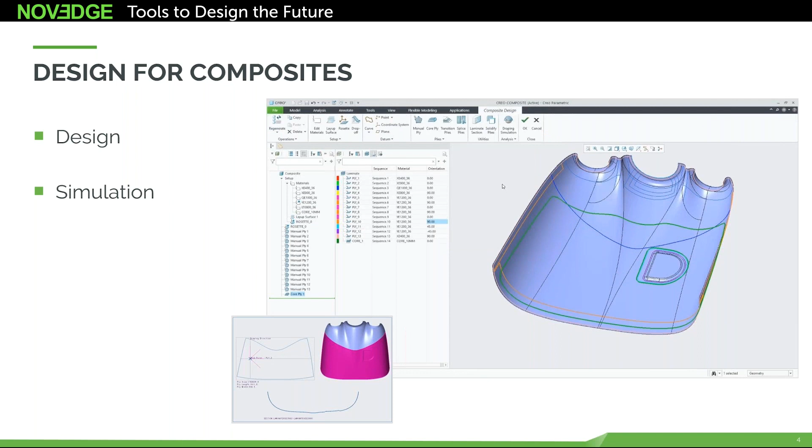Outside of the standard types of analysis, you can also simulate the draping of these different composite designs. Essentially draping, say, a cloth over a given shape is what it would look like, and it's going to drape in a certain manner, helping us understand the stresses, the strain in that action, and really analyze whether or not it can be flattened. If it needs to be split up, you get to see a little bit more into that as well.

To document all of this, we have plybook creation to create the 2D drawings. A lot of that's going to be working from templates, where we'll set up templates that lay out each layer into an individual sheet, really automating the process of getting each of those defined. And finally, from the manufacturing side of things, we have the ability to splice up your plies, split them, and do darting if you need to. One thing I will mention with composites is that this is actually going to be included in the first maintenance release of Creo.

This won't be in the very initial release of Creo, it's going to be in Creo 10.0.1. So by the time you're watching this, it may already be within the tool, but if you're closer to the release of Creo 10, it's going to be out in that first maintenance release, coming up in the near future. Some very strong capabilities there, especially if you're working in the area of composites - definitely something you'll want to look at.

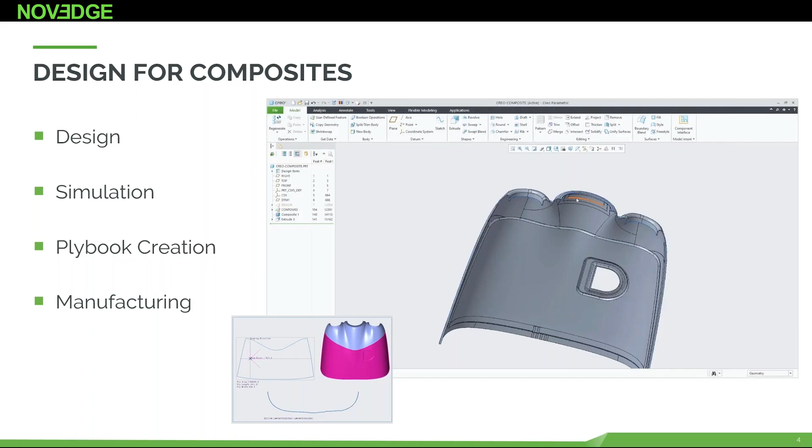Now moving on, we're going to talk a bit more about design for electrification. We've seen a recent resurgence in the need for electrical design, especially as it integrates into what we're doing on the mechanical side of things. So it's an area that we at PTC and Creo continue to invest in, and it starts first and foremost with some usability items.

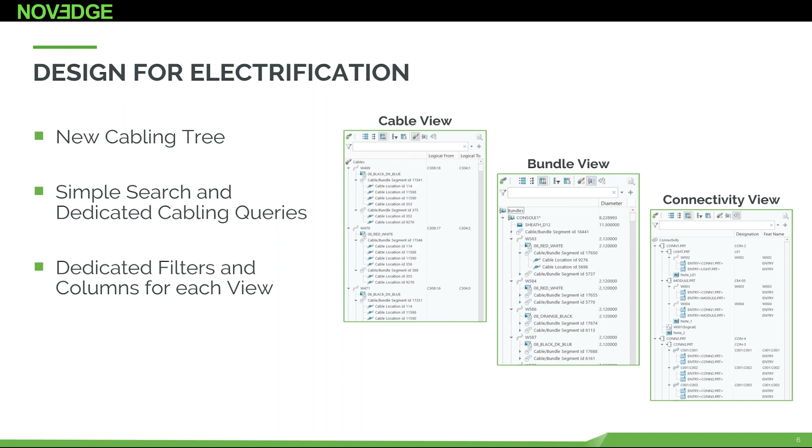A huge part of this year is our new cabling tree. In past versions of Creo, your cables, bundles, and connections were mostly mixed in with the rest of the model tree you're working with. But now you have a dedicated tree that organizes the information much better, giving you the ability to narrow down and search between each functional area quickly. You can work with dedicated filters and columns for each view, giving better visibility into the structure of your harnesses, making it easier to find elements, easier to investigate and validate the harnesses, and keeping your functional design as organized as possible.

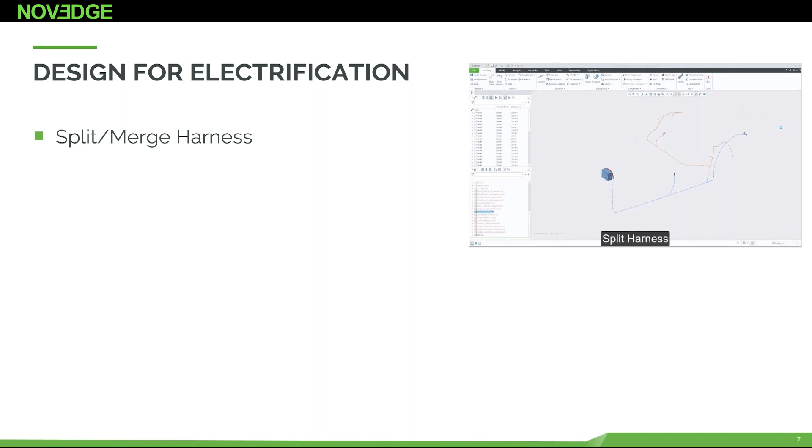The next, and probably the largest area of enhancement in the electrical world, is the added ability to split and merge harnesses. One of the big areas this helps with is collaboration. Say you're working with a large harness and want to split it up - we can split it and work with multiple designers on that, helping you be more efficient and do more work at once. Then once you've completed the work in each area, you have the ability to merge the harnesses back together into a single harness to take forward from that point.

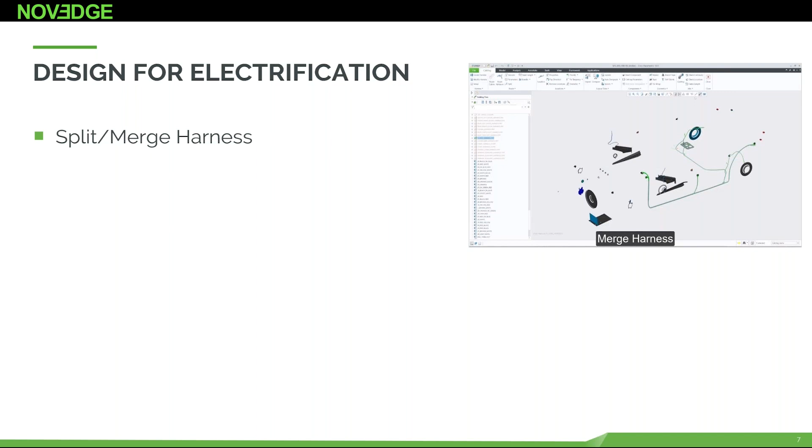Very useful there, with multiple use cases it can help with. For example, say you have one section of a harness that could be useful in a separate design - you could split that area off and use it elsewhere, or even from a manufacturing perspective, if your harness is getting large or complex, you can split it up to ensure your manufacturing documentation doesn't become overly complex or crowded. A very useful tool that we can use at any point in the process.

From an ECAD perspective, we've been expanding our ECAD integration over the past couple of releases of Creo. Now with Creo 10, we've expanded this to include the ability to import paste mask into our design. And whenever it comes to ECAD holes, we now have the ability to define ECAD parameters to those holes - this can be added in, or customized using an ECAD.hole file. So a few different areas we've worked on in electrification, helping us build that into what we're doing on the mechanical side as well.

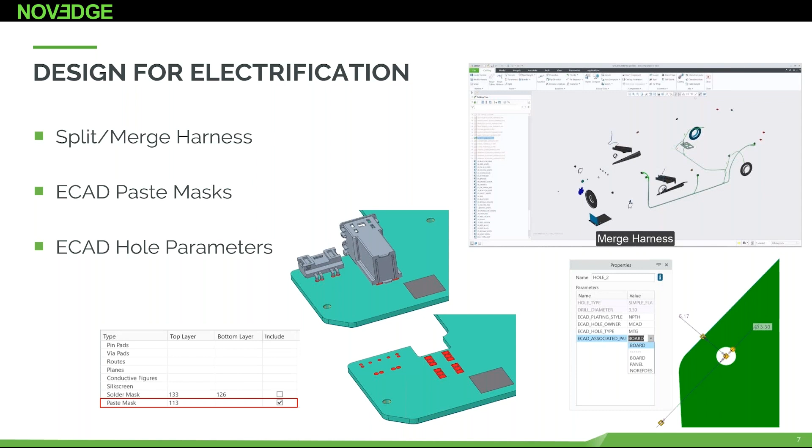Moving on, we're going to talk a bit more about design for ergonomics. We've had a renewed investment into ergonomics starting back in Creo 9, and we've continued and expanded that here within Creo 10 as well. First, similar to other areas, is general usability - giving you the ability to not only use the dragger on certain areas of your mannequins or models to move them around, but also now the ability to define certain distances as well in that environment.

One of the other things that got added in was the ability to measure angles between different joints in the mannequins. Say, for example, you select one of the arms and one of the lower legs. It understands each of those components and gives you angle measurements between each of those.

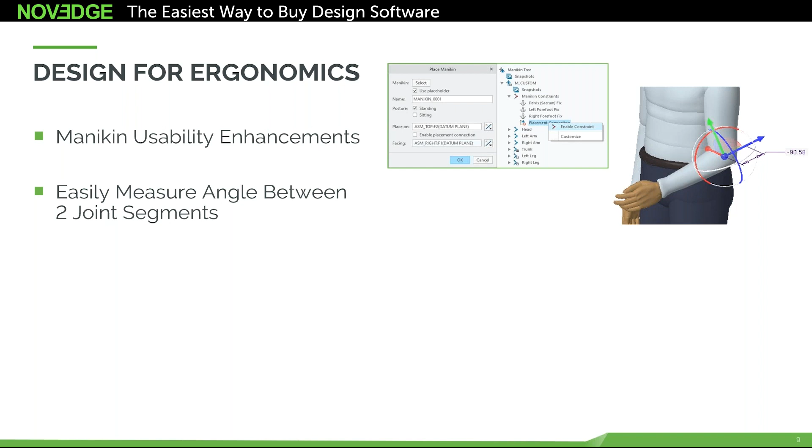We've also expanded the reach envelope. In the past, it was really just looking at the pointer finger, but now you can look at different areas of the hand, like the palm, the thumb, the middle finger, and it could even be combinations of those as well. So a little bit more granularity that you can get in that reach functionality.

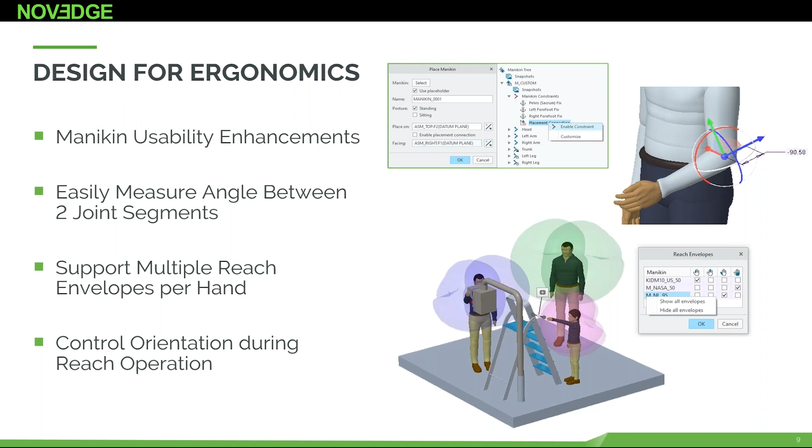A little bit more into the reach - say, for example, you want to place the foot up on a step. You can now say exactly what part of the foot's going to contact that. So just more control overall on how that's being oriented.

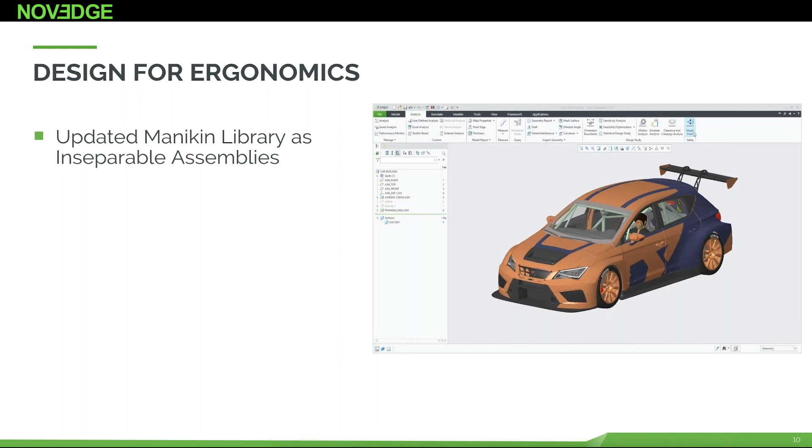Another thing that we worked on here is the Manikin library itself. We are able now to rebuild them as inseparable assemblies, which helps us from a management perspective and makes it easier, since it's just going to be stored as one object that we're working with.

From that point as well, we have the visual field, which had some enhancements too. We have the ability to perform reflection analysis by looking at what we define as a reflective object. For example, like a mirror, you can see that we can get the resulting surface cone that represents the visual field reflecting from that surface.

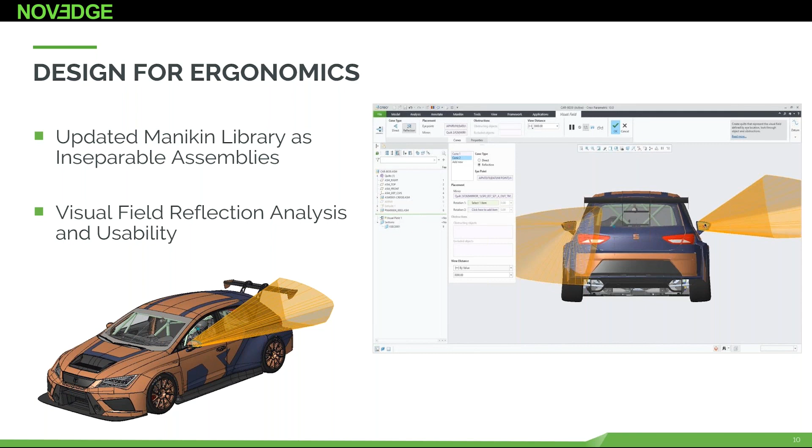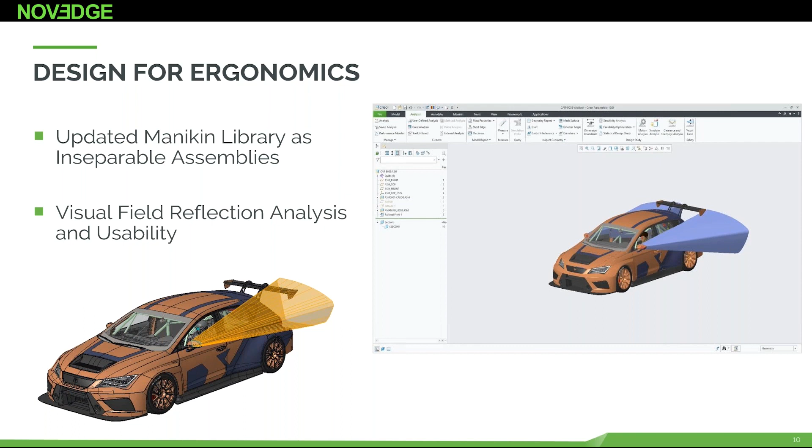One thing that it enables us to do is view that cone from multiple different orientations. Say, for example, we want to move these mirrors and angle them in different ways - we can see and understand how that's going to affect our vision, even see if there's anything obstructing that view, overall giving us a much better understanding of that visual field. That's something you can do either directly from an object or from a reflective standpoint as well. So really a lot of different areas that we improved there over on Manikin and the ergonomics.

Now switching gears, I'll talk a little bit more into productivity and usability. It's one of the biggest areas that we've had to focus on for a number of different past releases of Creo - just things that help the everyday designer do their job better.

One of the biggest things that we've had in recent memory is working with the model tree, and we've done a lot with that. We've done everything from adding in the design items tree, the quilt and body evolution view, and we're expanding on those here in Creo 10 as well.

It's starting with the improvement of reordering of objects, specifically within the context of our assemblies. Whenever you're moving items within an assembly, you want to make sure that you're just simply reordering the assembly and that it isn't restructuring the assembly context as well, which could have some unwanted effects. So we want to make sure you get a dialog box whenever you make those movements, to ensure you understand the changes being made and don't have any unintended changes happening without you knowing about it.

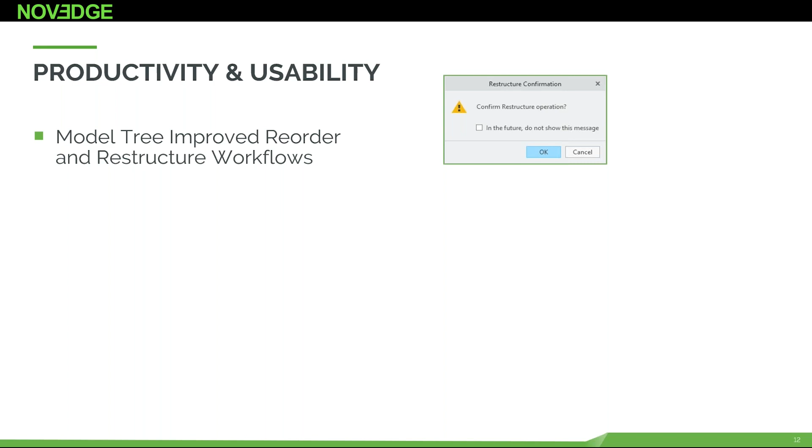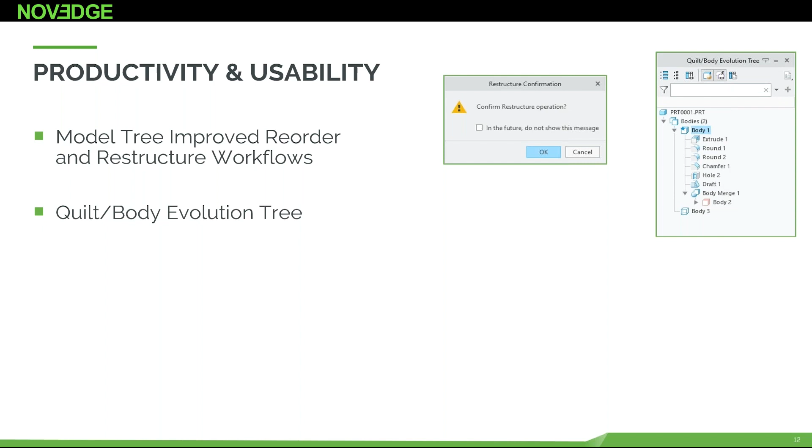Dragging and dropping in the quilt and body evolution trees has now also been made much easier and more efficient. We added in support for columns and search in that history as well - general improvements made to how we display each of the trees that we're working with, and the control that you have in that aspect.

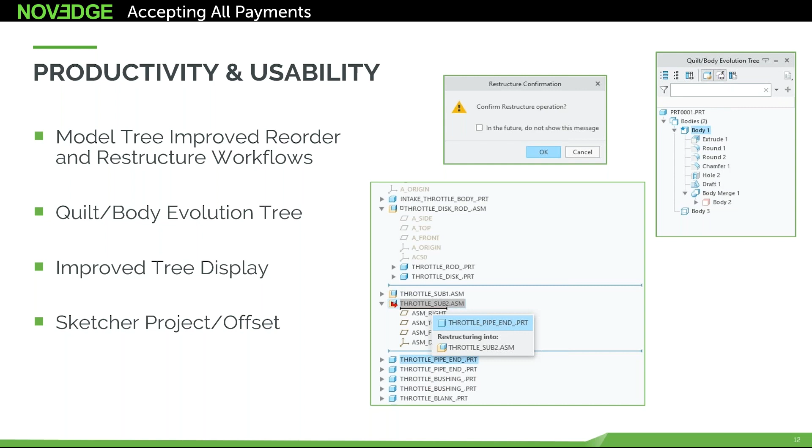From a modeling perspective, we've also continued to work inside of the Sketcher tool. First, with the project and offset, what you can do now is work with those from construction geometry - you can turn each of those into construction geometry. We've improved the troubleshooter behavior to understand why something might be failing if it was set up incorrectly.

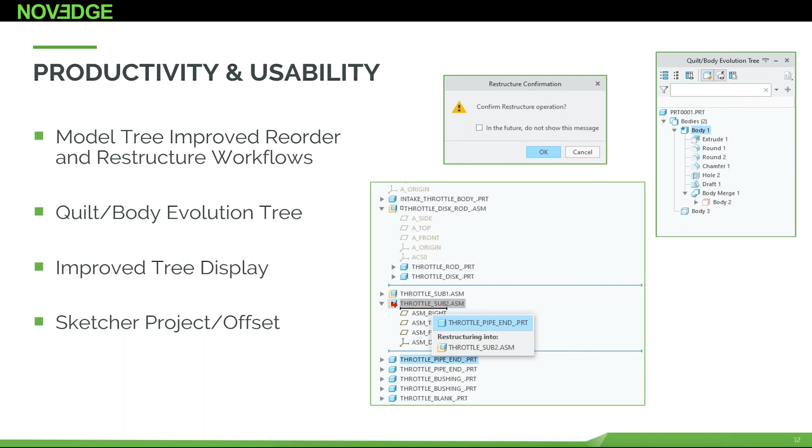We can now also include all curves in a feature that can be an input into each of those commands, and the same behavior is going to work for more trajectory-based features as well.

Looking at the hole feature, simple holes can now contain parameters and notes along with them. We made a number of different enhancements in patterns, mainly focused on working with patterns in multiple directions, adding additional controls from that perspective and different parameters that we can work with to drive those patterns, making it a lot easier to work with.

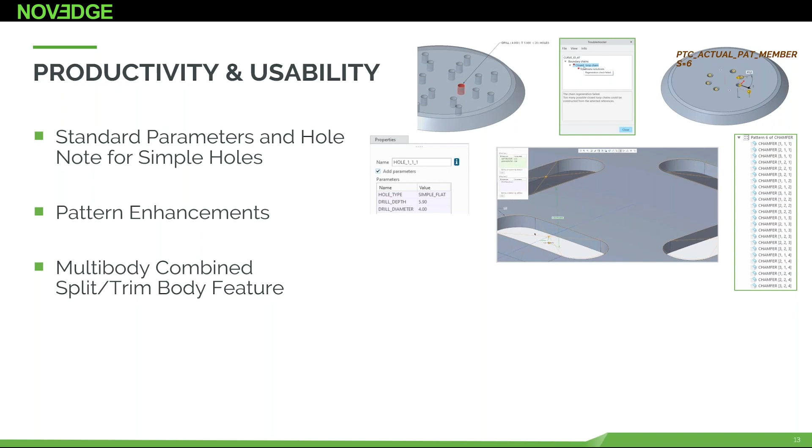Multi-body was a huge addition back in Creo 7, and with every release we've continued adding to it, and it's no different here in Creo 10. One of the biggest things we're working with now is the ability to split and use the trim feature, giving you more control in Boolean operations for what parts of the bodies are kept after an operation, if you want to create multiple bodies, simplifying the process further when doing multi-body operations.

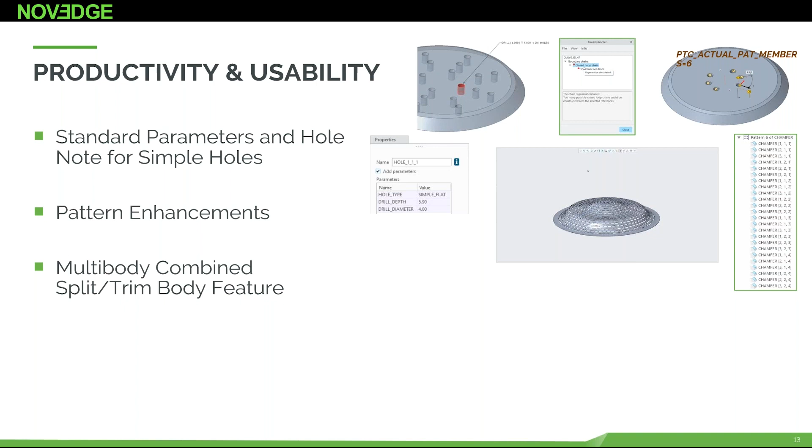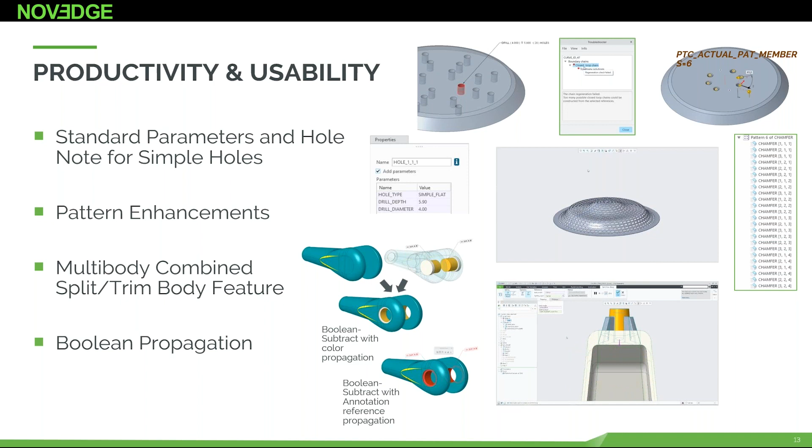We also did work on propagation. Say you go to subtract one body from another, you have the ability to propagate the color or appearances from that body to the resulting body. This could also include references. If you want to propagate those over, it's something you can now include and make sure you aren't losing any of that information whenever you do your Boolean operations.

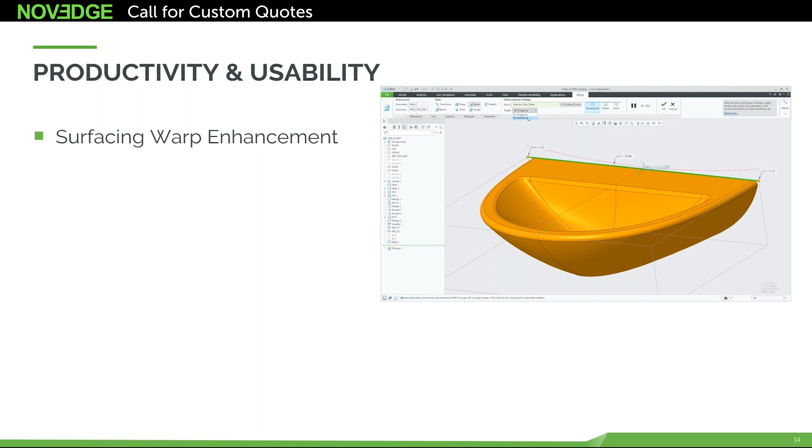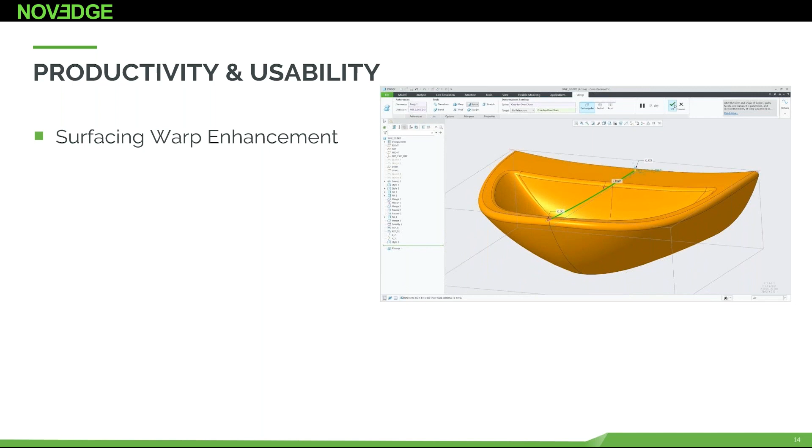Looking at surfacing, one of the things we added was to the warp capability. There are actually two new capabilities in that tool. First is the stretch tool, which gives you the ability to stretch an object in a given direction. We can now do that up to a given reference that we define. Before, it used to essentially be based on a dragger. We can now use, say, a datum plane, for example, if you want to move it up to a certain reference.

The other thing we enhanced in the warp tool is the spine. We can now warp the model from one curve to another reference curve, and it's going to deform the shape accordingly.

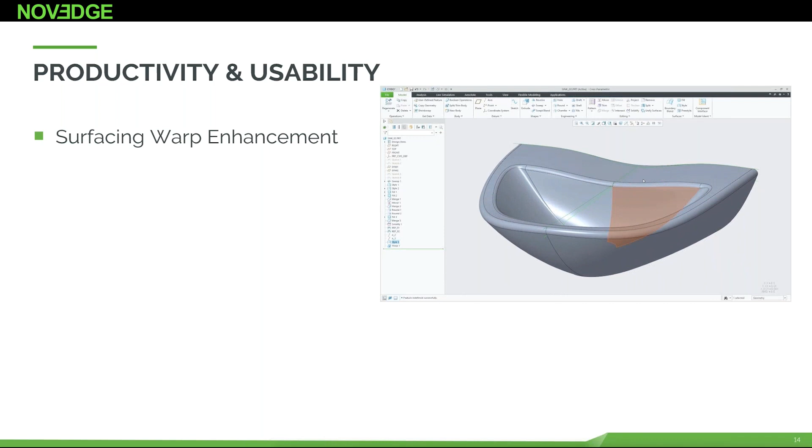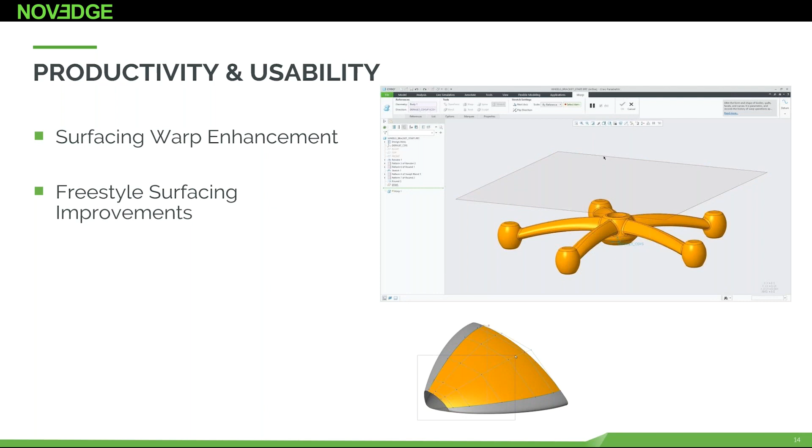Over in our freestyle tool, which we use for freeform modeling, we added rotational symmetry as an input. So I can take an object and rotate it however many times I need to around a given axis. One other thing we added is the ability to lock certain areas of a mesh.

Whenever you build out something in freestyle and you like how it looks and you don't want it to change, you can now lock that area in the mesh so you don't have any unintended changes happening to it as you're moving other parts of the model.

Now over in the style tool, or Interactive Surface Design Extension, we made improvements to curve connections, specifically the smooth normal connection. What that means is whenever you mirror a curve about a plane, the resulting curve connection at that mirror point is going to be G3 acceleration continuous. A very useful enhancement, making that behavior work a lot better.

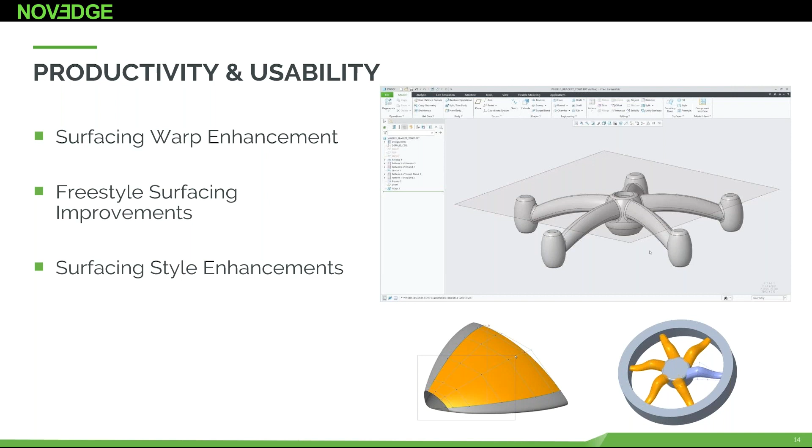From that point, we also introduced box selection of control points that you're using in the style tool, making those selections much faster and easier to make than before.

Moving on to model-based definition, this has been a huge area of focus for a couple of years in Creo. There were a couple of things we've added here.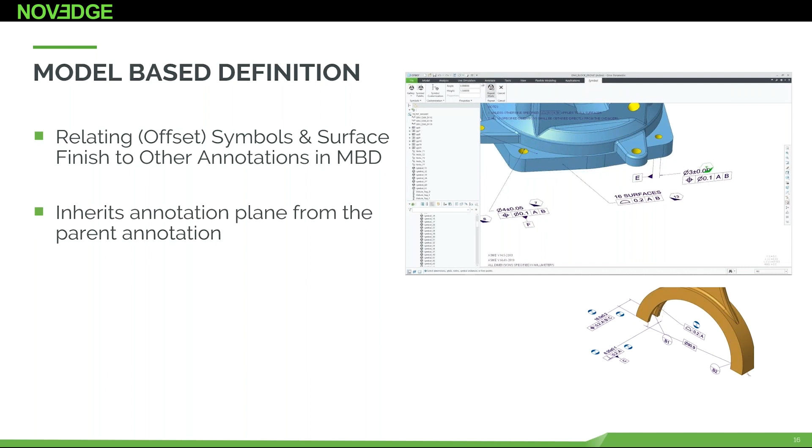First and foremost was symbols. We can now relate certain symbols or surface finishes to other annotations that we have laid out over in model-based definition. That's going to inherit the plane of that annotation, essentially grouping or stacking those annotations together with one another. And of course, we have associated cross-highlighting between any of the related annotations.

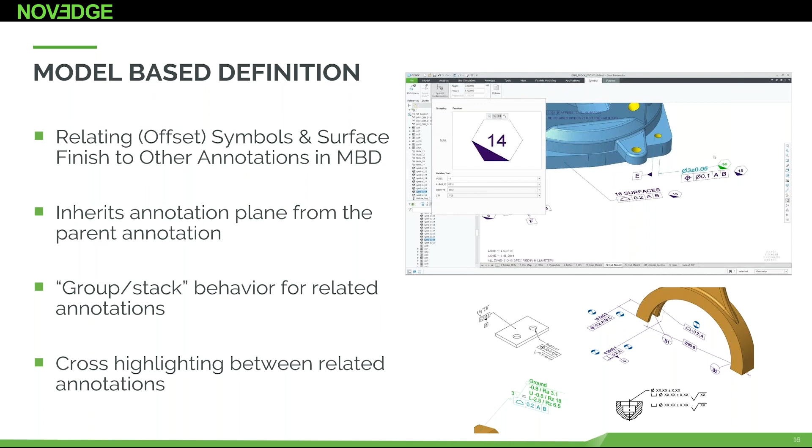So these are all standard model-based definition capabilities we're continuing to work with whenever it comes to symbols. Looking at some of the specific tools for model-based definition, the biggest one is the GD&T Advisor. This is an extension in Creo for giving guidance during the application of GD&T from within the context of model-based definition, as well as validation that what you're laying out has been done correctly.

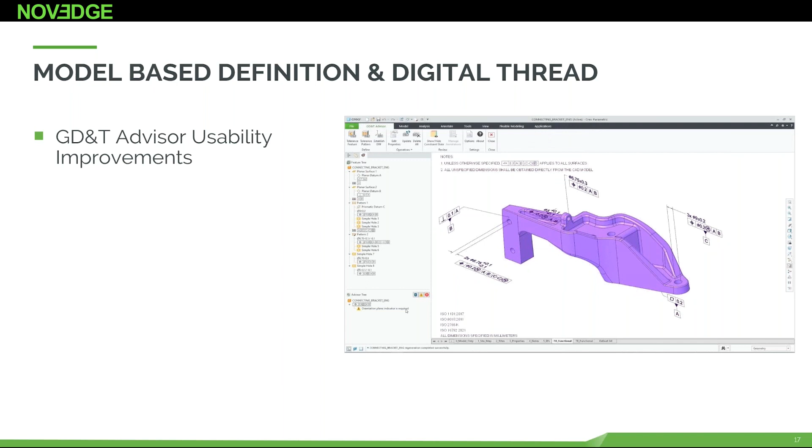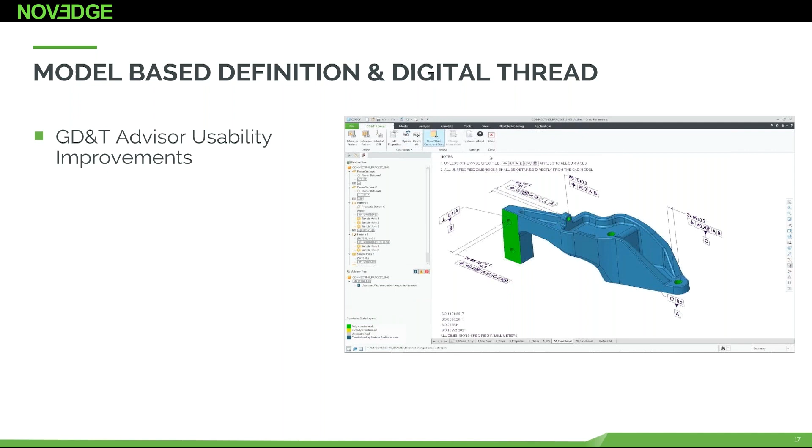We've seen some improvements here as well, including general usability improvements in the tool. So improved semantic behavior, first and foremost, for the general profile information. Say, for example, you have a general profile applied to your model, Creo understands that semantically now and can analyze the model accordingly. And as it relates to our standards, ASME and ISO that you might be working with, we continue to improve our compliance and detailing to each of those standards.

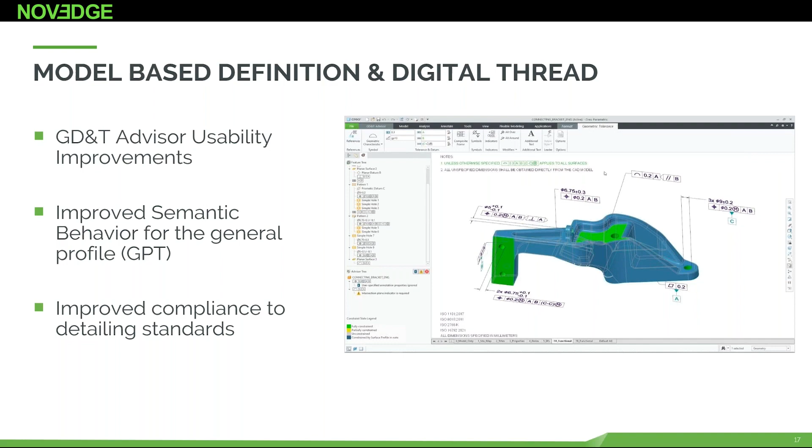Right now, over on the simulation side of things, we have multiple different areas and extensions that we've worked on, starting with Creo Simulation Live, or CSL.

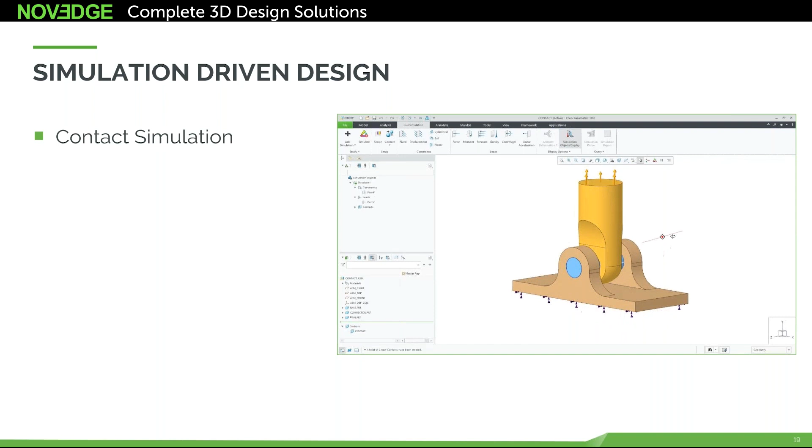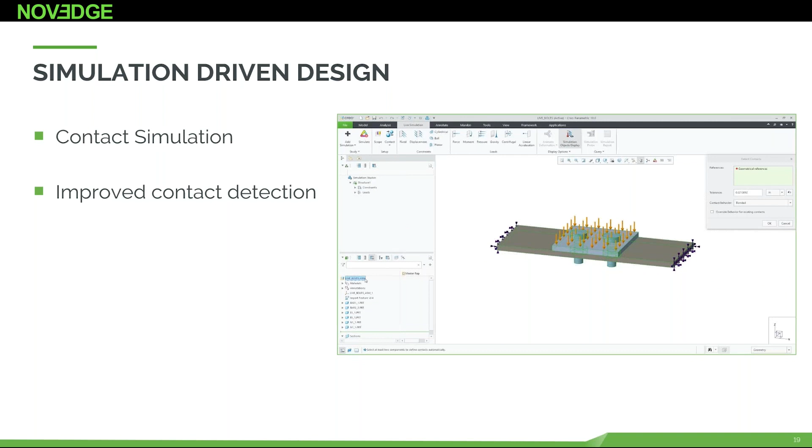One of the biggest things we added in is contact support. It's something we initially released in a maintenance build of Creo 9, I believe Creo 9.0.3, but it's been more fleshed out here with the release of Creo 10. One of the main updates is that previously you could only detect one-to-one contacts in the model, but now you can look at one-to-many, many-to-one, or any combination of those, really helping enhance the use cases for those contacts. From there, we made general enhancements to the results, making sure you can see them in a much better manner.

Specifically for fluids, what you're able to see now is complete vector results. So whenever you're working with your fluid type simulations, you're going to be able to see a little bit more into those vector style results.

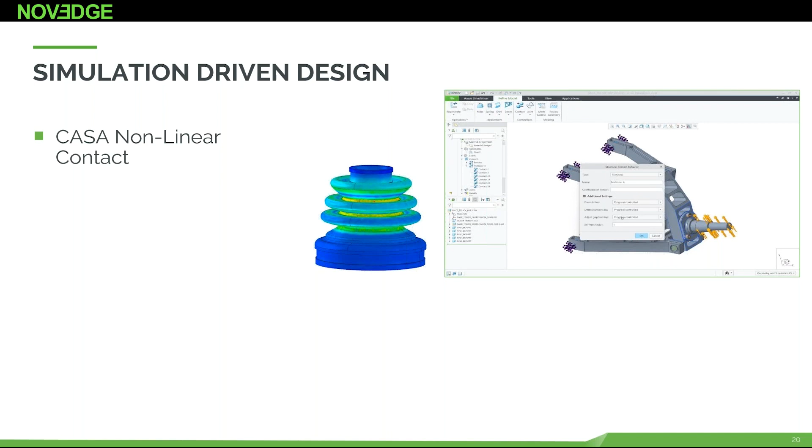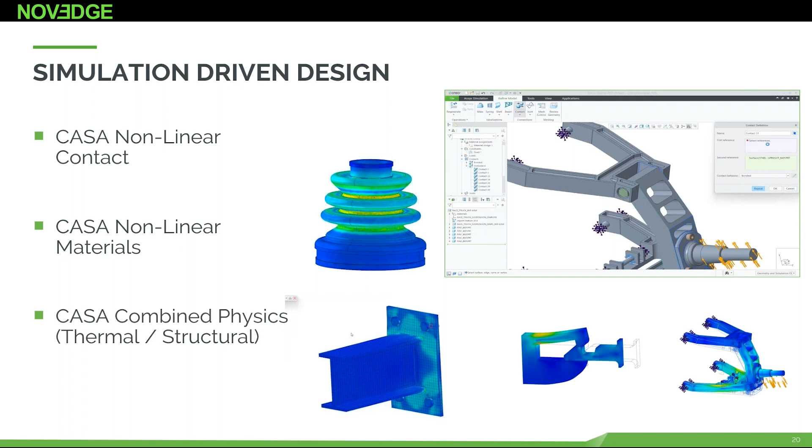As it relates to Creo ANSYS, we introduced what we call Creo ANSYS Simulation Advanced. This adds in a few different capabilities. First and foremost, nonlinear contacts. We're also now working with nonlinear materials, including hyperelastic materials. We also now have the ability inside Creo ANSYS to do combined physics when it comes to structural and thermal simulation. A big use case there would be thermal expansion, something you can now work with using those different combined physics.

So a couple different areas we're working with there, looking to really expand the tool and the different capabilities we provide to you with Creo ANSYS.

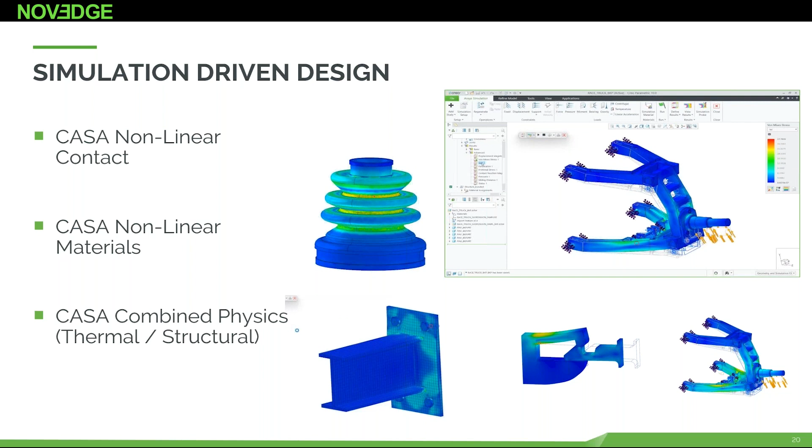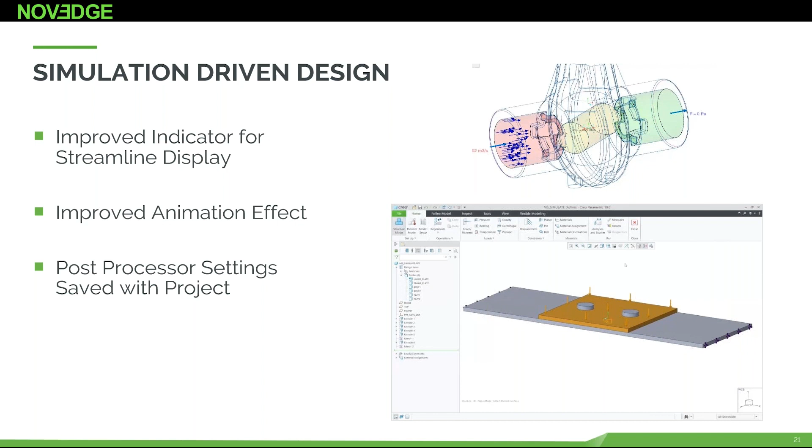Over on the side of Creo Flow Analysis, we continue to see improvements as well. We improved the indicators for your streamline displays, and improvements to the streamline animations too. One of the other biggest things we added was working with your post-processor settings. If you go through a study and configure your post-processing the way you like, you can now save that off and use it in other studies going forward. A welcome enhancement that we have there.

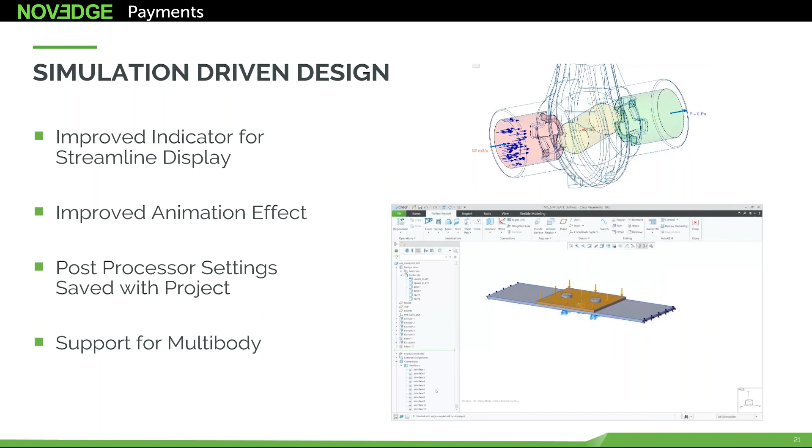From a standpoint of Creo Simulate, we now support multi-body type studies over in Simulate as well. There's a ton that goes into that, from interfaces between bodies to materials, mesh. So really a lot of new options that you have for working with multi-body there.

Generative design is a constantly evolving tool that we have in Creo. One of the biggest new enhancements is the ability to define rotational symmetry. This is a new type of design constraint in your design criteria for generative design. It's something we can combine with planar symmetry, which we've had already up in generative until now. So it opens up the door to a lot of new designs that can be built out in generative.

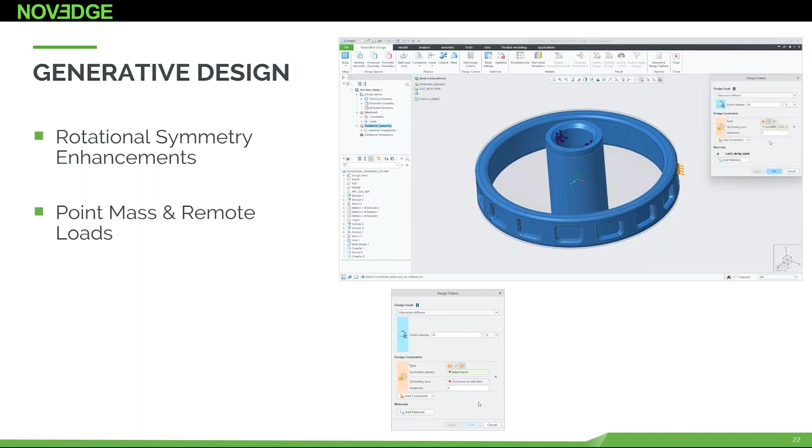A couple other enhancements: we added support for point mass and remote loads. We also built out the capability of making measurements from the hybrid or generative body that we produce, over to our standard regular geometry that exists in our Creo designs. This makes the integration of what you pull out from generative with everything we design normally parametrically in Creo a lot easier to work with, going between the two.

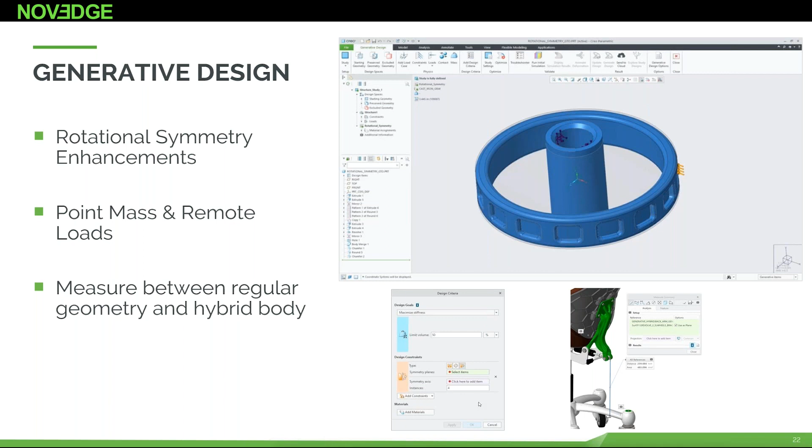Last area I want to touch on, and it's a huge area of enhancement in Creo, is around manufacturing, both on the subtractive and additive sides. I'm going to go ahead and start first with the additive capabilities. One thing we added here is enhancements to our formula-based lattice cells. If you haven't worked with these, they are lattice cells built in a certain orientation and fashion where they don't require the use of support materials to create.

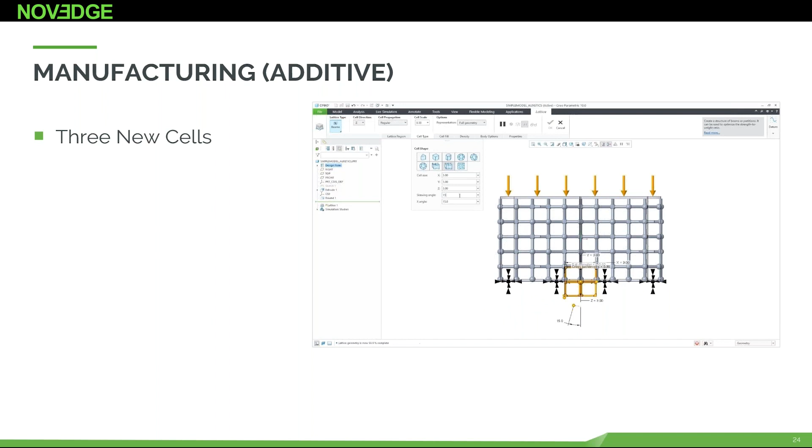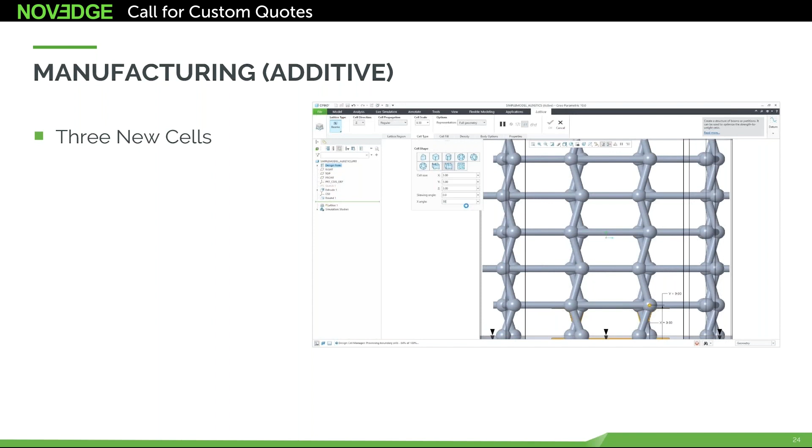What we added is the ability to change the density of those lattice cells depending on simulation results you're getting back. For example, say you run a simulation and find certain high stress areas. Those different cells can now thicken in those particular spots, while having thinner walls in the areas with lower stress concentrations.

In addition, we added a few different areas as well. First and foremost, we have auxetic cells. This is a very unique characteristic that represents a negative Poisson ratio in our models. Normally with a positive Poisson ratio, whenever you have deformation with those cells, the model will bulge outwards. But with negative Poisson ratio cells, that deformation will actually go inwards.

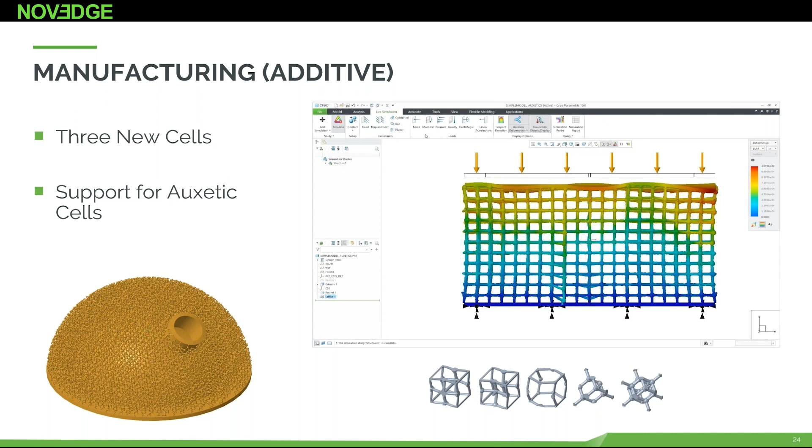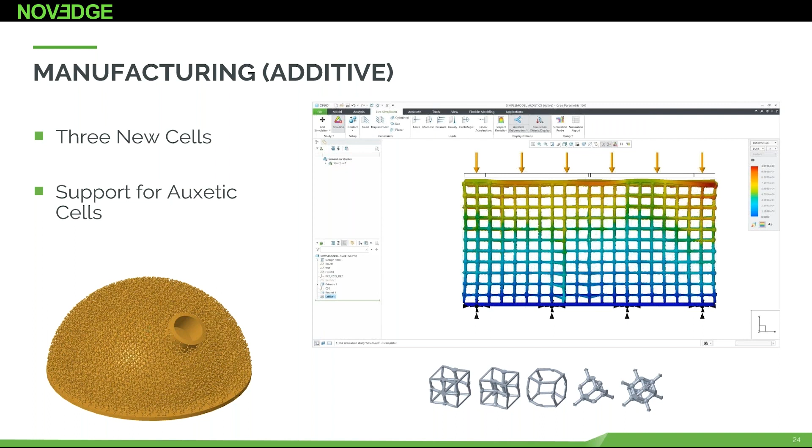This can result in some very unique use cases that we can play into, a lot of different areas to take into account, and a lot that we're doing with those formula-based cells and even the beam-based lattices. That's something we're continuing to expand, the characteristics and properties you can change. We have that simulation-driven variability for our lattice designs.

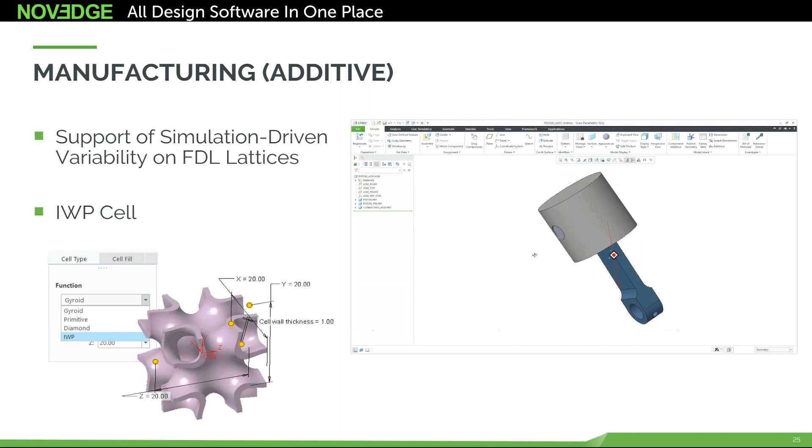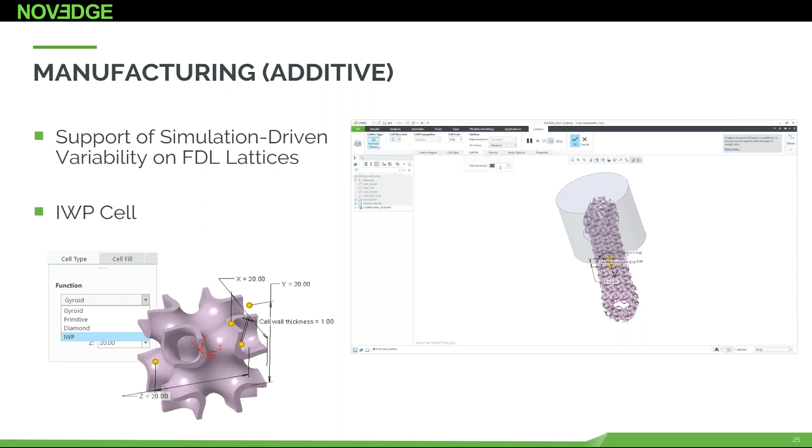In addition, we also introduced an additional formula-based cell called IWP cells. This expands the use cases and lattices you can build out, to help us design better before we ever go through to get ready for a 3D print, build out support, or put anything onto a tray. We really want to make sure the model we're putting into 3D printing is optimized for that process as well. So latticing helps us get there.

All right, finally moving on to subtractive manufacturing. We've got a big focus on expanding the capabilities in our high-speed machining tool. We now added support for barrel tools, allowing us to do wall and floor finishing tool paths. Those types of tools can get you very precise finishes while also requiring fewer passes of the tool, so it's more efficient as well.

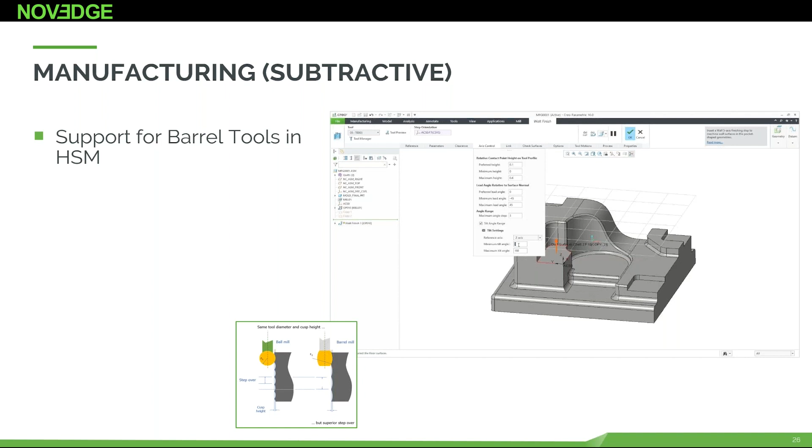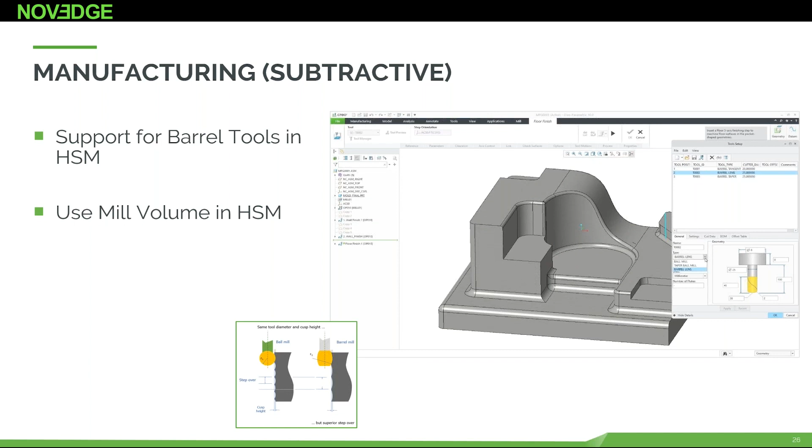Mill volumes has been a standard in our normal NC tool paths. This is also now added into our high-speed machining as well, and this is something we'd use for roughing and rest roughing.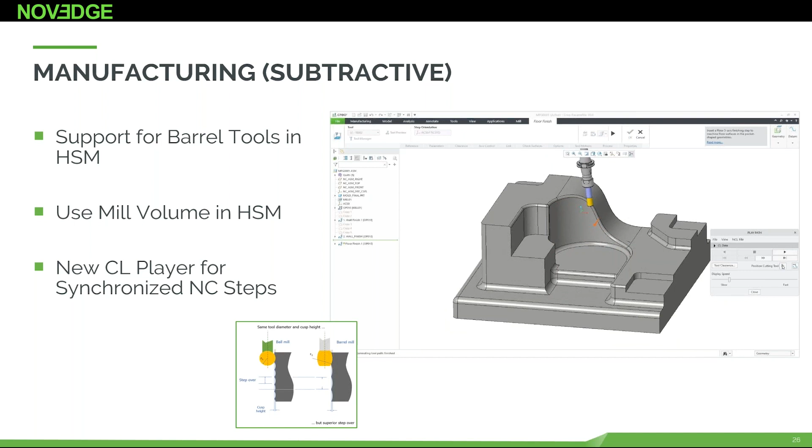As it relates to multitask machining, we added a new CL player for displaying the tool paths our model is moving through. We can show all the paths being calculated, as well as looking and checking for collisions and gouging. Then finally, for area turning, we now have the ability for cutter compensation to look at each individual slice rather than the entire operation.

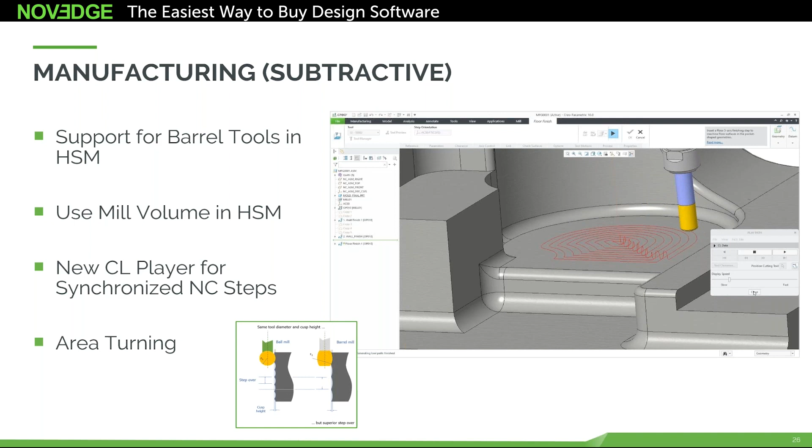And for each sequence, we also added a clear distance parameter, so at the end of each sequence it can return to a certain distance before moving on to the next step. Many of these enhancements are all customer driven. We're always trying to listen to what our users are saying, looking to make you more productive and efficient, specifically as it relates to machining, and to give you higher surface quality.

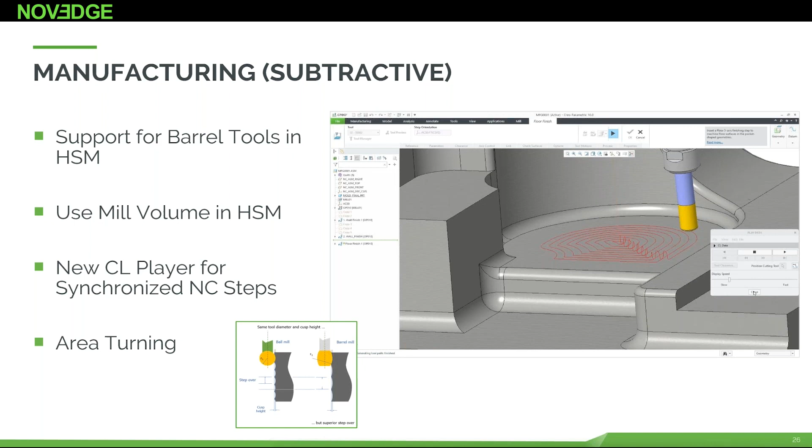Okay, so I want to wrap up and go back over some of the main areas I touched on today, to give you a bit of a look at what that looks like in the context of Creo, and just recap some of the areas I covered today.

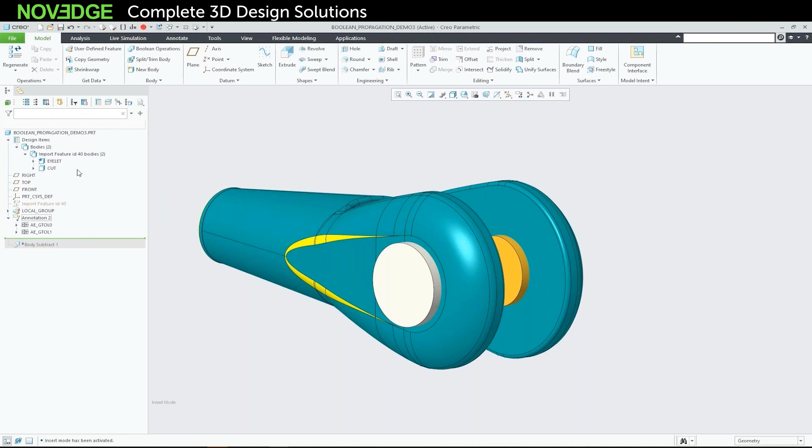To start, usability is going to be a big aspect we're always going to see enhancements to. It could be multi-body, like I mentioned, for propagation of appearances. It could be working in assemblies for making reorder more efficient. Even areas like flexible modeling continue to be improved, making your job as a designer as easy as possible. Composite design is a brand new enhancement we're going to have in Creo.

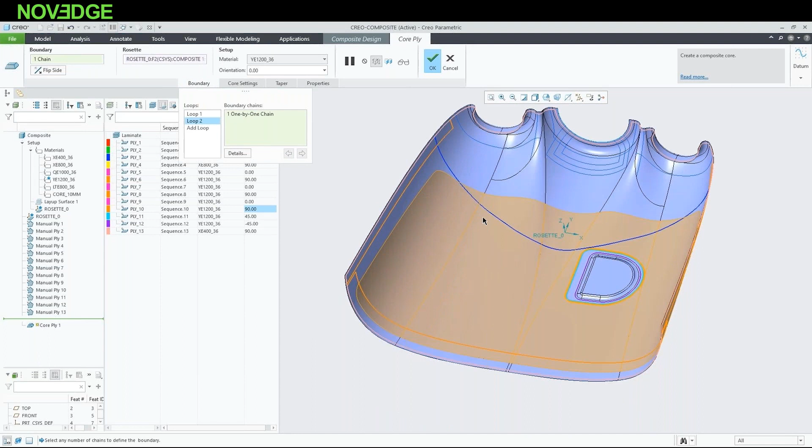It's a very robust interface for building out those composite designs, for running simulations on those composites, and then automating the creation of your manufacturing documentation from that. It's a powerful tool that plays a part in many different industries you're going to be able to use that for.

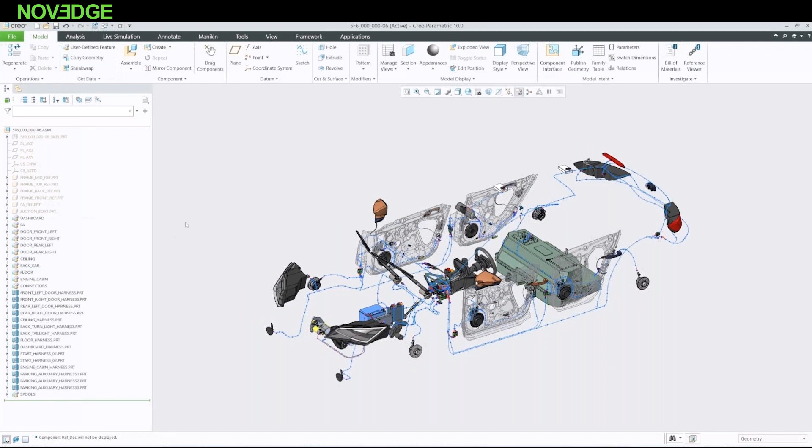Then on the side of cabling and design for electrification, it's going to work a little bit different from before, and for the better. You're going to be working in an overhauled tree that makes design intent much more clear, and with the added ability to split and merge harnesses, you're going to be more efficient when working in that area as well. Same thing whenever it comes to integrating with your ECAD tools—you're able to bring in data to do what we need to on the mechanical side here in Creo Parametric, making collaboration between those two worlds a more streamlined process.

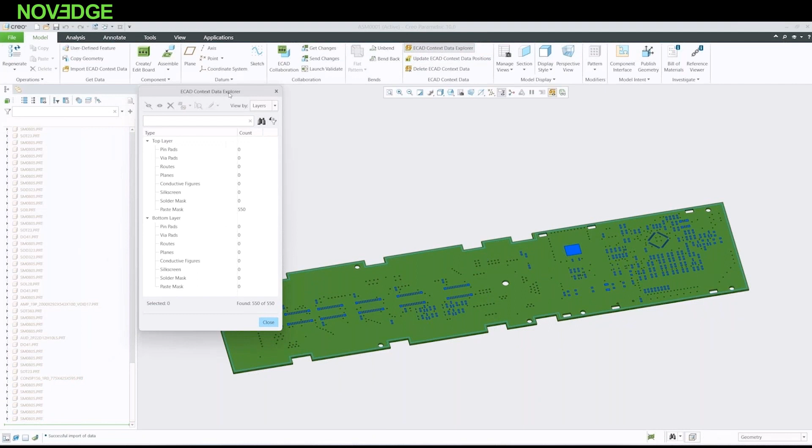And then on the design side for ergonomics, that's another area we've seen investment into, making sure that your users and the products you're working with—they can see what they need to, they can feel the things they need to, and from a usability perspective, making sure they can reach and work in the best way possible.

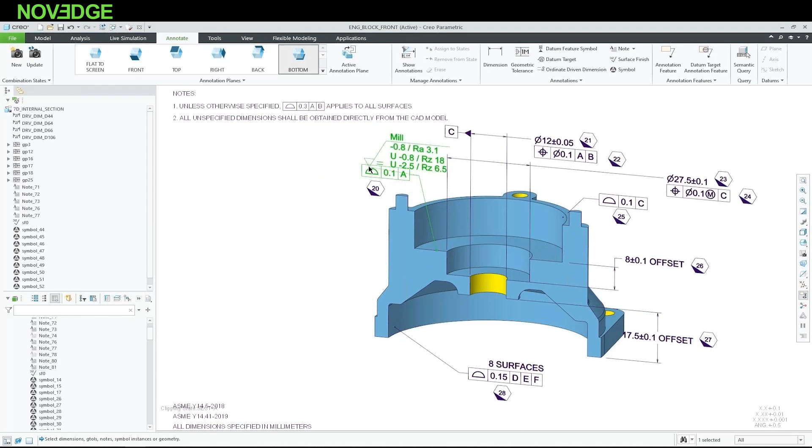Looking at model-based definition, it's another growing area, not only in the world of design and manufacturing, but really across the enterprise. We're adding tools, expanding our symbol capabilities, and making general improvements for usability, making sure you're getting things done quickly. As it relates to the GD&T advisor and the EZ Tolerance Analysis, those tools are assisting with getting annotations built out as well.

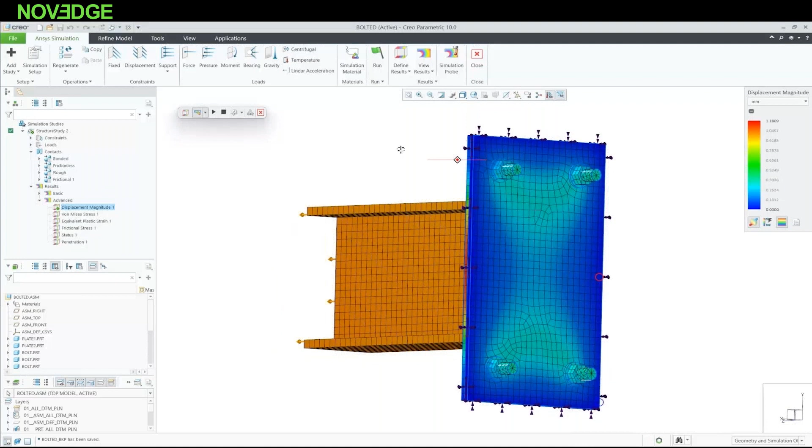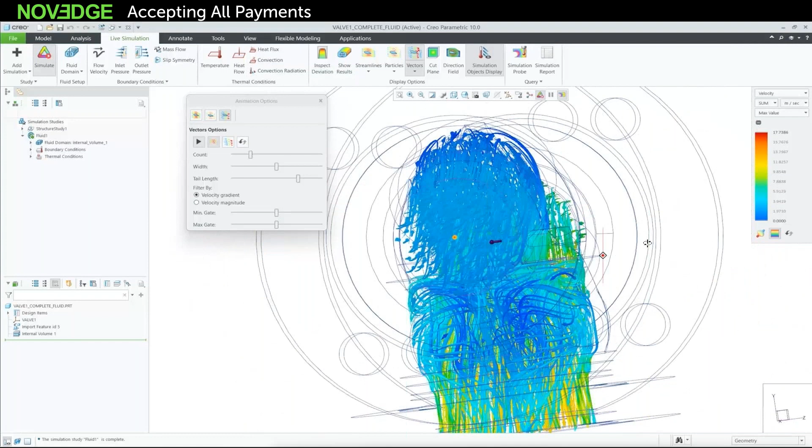And on the area of simulation, we're continuing to expand our partnership with ANSYS. First, in our high-scale validation over in Creo ANSYS Simulation, we're able to work with nonlinear materials, hyperelastic materials, nonlinear contacts, combined physics—a lot of different areas. And if you're looking for quicker simulation feedback, Creo Simulation Live is giving us more capabilities than ever before.

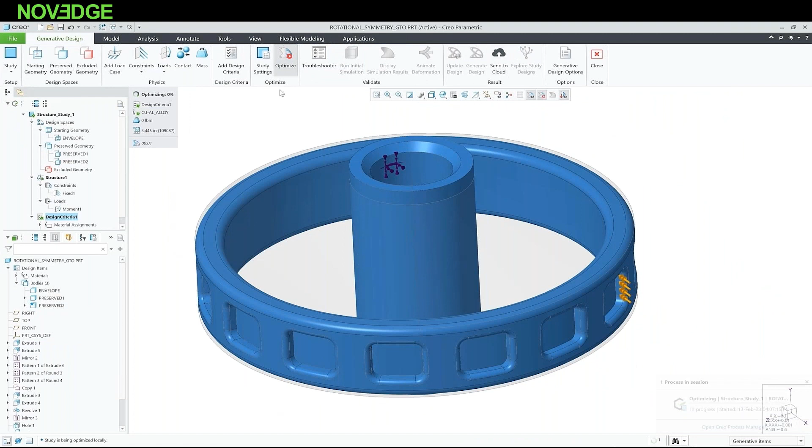Whenever it comes to working with emerging technology, or here within generative design, that's another area we continue to see enhancements in. If you're working with rotational symmetry, you're going to be able to build out more models that help with that, and tie that in with whatever types of manufacturing you want to use, whether 3D printing, building out casts, or even an extrusion process.

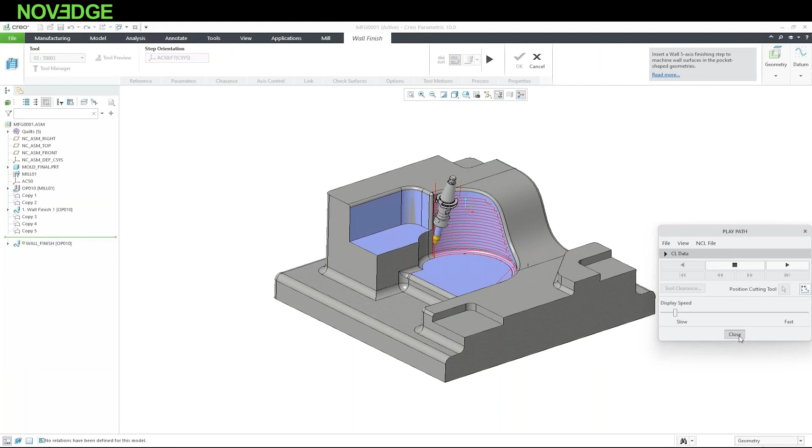At the same time, we continue to work with different areas of manufacturing—3D printing, subtractive manufacturing, working with lattice cells—a lot of different areas we'll continue to see improvements to, whether for 3D printing or for building out toolpaths over here in Creo NC. Always different areas we continue to see improvements around.

That covers just about everything I wanted to talk about today—a lot of different functional areas we've worked with and improved on, and a bit of a look into some of the areas we're continuing to invest in and the direction we're headed. Hopefully that gives you a better understanding of exactly where we're at with Creo 10. Like Barbara mentioned, this really is the greatest release of Creo we've had up until now, so you're going to be able to do much more than ever before.

Thank you so much. Now I'm a believer. That was great, Paul, thank you again.